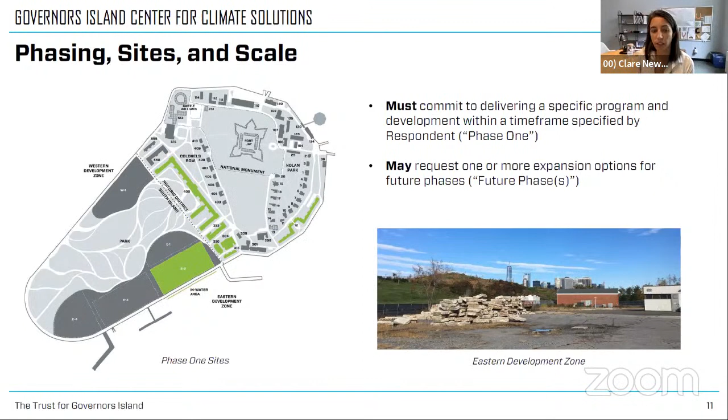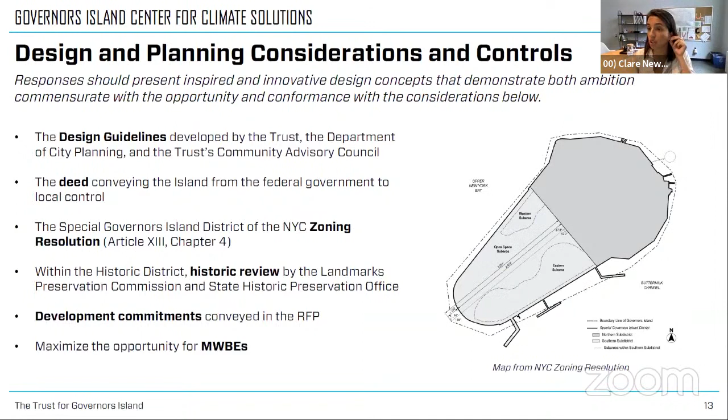Once we have the responses, this summer we'll be leading a selection process. We have partners from across the city who are part of that selection committee, including DCP, the Mayor's Office of Equity, and the Mayor's Office of Climate and Environmental Justice. We'll also be seeking, as part of this phase of the project, something new that wasn't part of the RFEI: input from a formal outside advisory committee. They're not providing selection inputs, but they're helping advise the committee on strengths, weaknesses, and opportunities associated with this proposal. That advisory committee has been announced.

It's formed of experts in the fields of climate science, environmental justice, environmental policy, philanthropy, and business.

And then, of course, to enable the review and public engagement, we're seeking significant detail around the programming and the design itself. Especially for phase one, we're asking for detailed design drawings and enough of the aesthetics that we can go out and explain to people what this thing is going to look like, as well as an implementation plan so we can truly gauge feasibility. For additional potential future phases, we're looking for conceptual level design, once again to help guide the selection and input process.

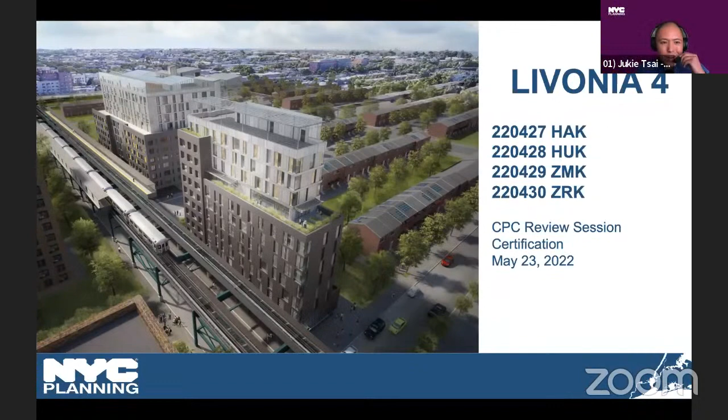This is an application by the Department of Housing Preservation and Development, HPD, for a UDAAP and disposition, an urban renewal plan amendment, and a zoning map and text amendment, all to facilitate 4 new 100% affordable 11 and 12-story mixed-use buildings, totaling 430,000 square feet with approximately 498 dwelling units.

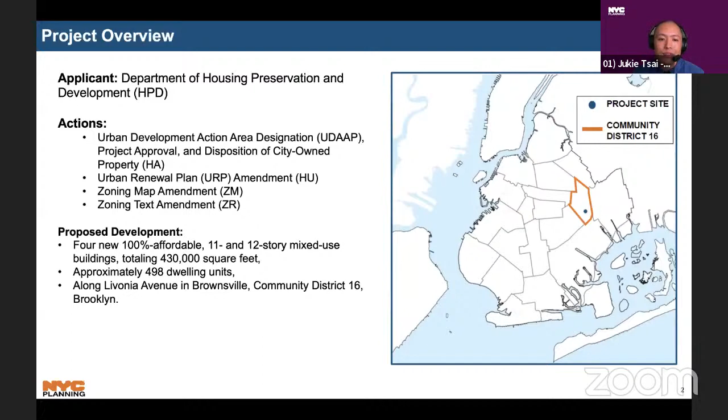This application has 2 project areas located along Livonia Avenue in the Brownsville neighborhood of Brooklyn, Community District 16. Next slide.

Livonia 4 is part of HPD's 2017 Brownsville Plan, which was a community-based planning process to develop a shared vision and plan for the future of Brownsville. In coordination with the release of the Brownsville Plan, HPD issued the Brownsville RFP to develop several large, vacant, city-owned sites within Brownsville, each focusing on a specific theme to address community goals. The theme of Livonia 4 is healthy living and food systems.

In addition to Livonia 4, the Brownsville Plan identified 2 other sites to be developed. The first was Glenmore Manor - the commission approved a rezoning for it in 2021. The other is Rockaway Chester, which is yet to come. Next slide.

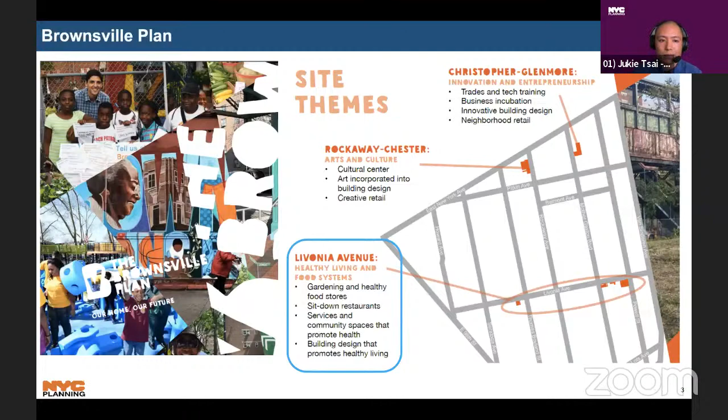The proposed developments at sites C1, C2, C3, and C4 are 4 new buildings containing approximately 430,000 square feet of floor area. This includes residential floor area, commercial retail floor area, community facility, and community facility with sleeping accommodations. This includes 498 affordable apartments and 15 parking spaces. Next slide.

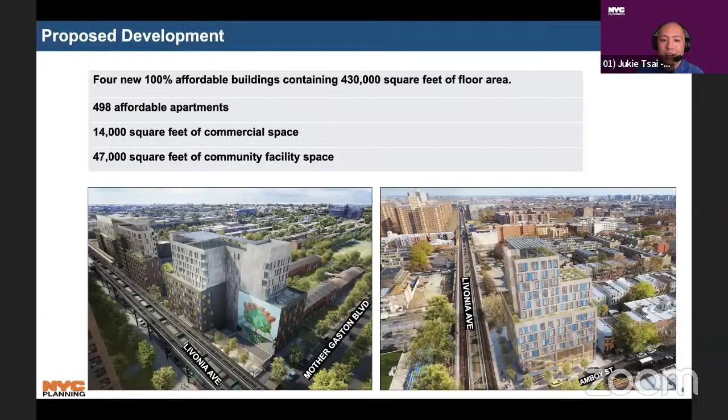Livonia 4 consists of 4 development sites within 2 project areas on Livonia Avenue along the elevated 3-train line. Project Area 1 is generally bounded by Livonia Avenue to the north, Powell Street to the east, Riverdale Avenue to the south, and Mother Gaston Boulevard to the west. Development sites C1, C2, and C3 are located within Project Area 1.

Project Area 2 sits approximately 5 blocks to the west, and these are pretty long blocks. It is generally bounded by Livonia Avenue to the north, Thomas S. Boyland Street to the east, Riverdale Avenue to the south, and Amboy Street to the west. Development site C4 sits within Project Area 2.

The surrounding area is primarily residential. To the north are NYCHA's Van Dyke houses, Tilden houses, and Brownsville houses, built around the 1950s and 60s. To the south are the Nehemiah homes, built in the 1980s. To the east, across the elevated L train tracks, are the Livonia apartments, built after the 2013 Livonia Commons rezoning. To the west is Marcus Garvey Village, which was subject to the 2018 Marcus Garvey Village rezoning and has since seen new residential construction.

The major commercial corridor serving the area runs along Pitkin Avenue, which runs parallel to Livonia Avenue, approximately 4 or 5 blocks to the north. It is out of the frame here. There are also clusters of commercial retail along Rockaway Avenue, where it intersects with Pitkin, and along Mother Gaston Boulevard, where it intersects with Pitkin Avenue.

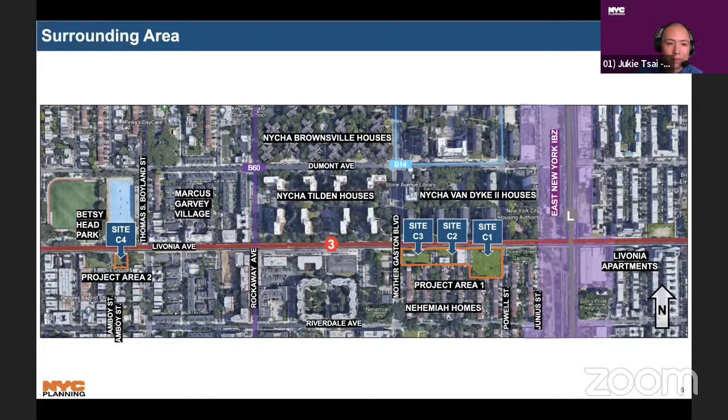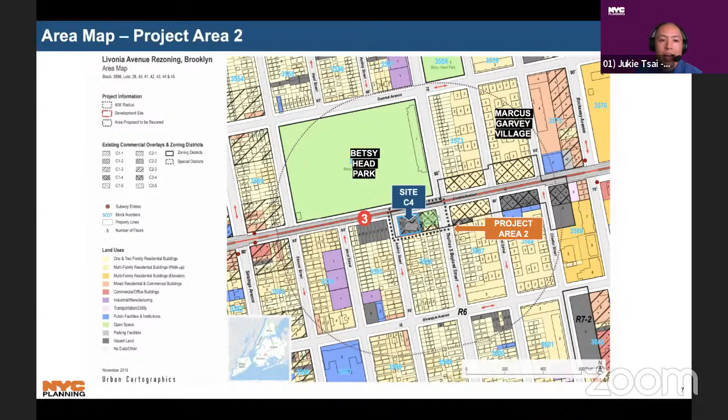The lots in Project Area 2 are zoned R6. The primary zoning district map within the surrounding areas is also R6. 3 blocks to the west is a C2-3 commercial overlay along Livonia Avenue, beginning at Strauss Street. An R7-2 district mapped with mandatory inclusionary housing is located directly east of Project Area 2. This was mapped as part of the 2018 Marcus Garvey Village rezoning.

There are a variety of land uses in the area surrounding Project Area 2. To the north is Betsy Head Park, open space shown on this map in green. To the south, east, and west are 1- and 2-family, as well as multifamily residential buildings, shown here in light yellow and beige. To the west, there's also vacant land shown on this map in gray.

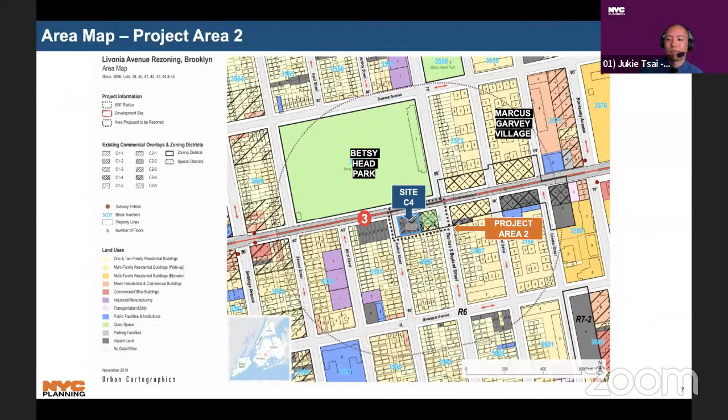Project Area 1 consists of 20 tax lots with a total lot area of approximately 80,000 square feet. It is mostly vacant city-owned land, though there are also some privately owned sites.

Development Site C1 is a 40,400 square foot zoning lot, currently vacant land owned primarily by the city. Development Site C2 is a 9,150 square foot zoning lot made up of vacant city-owned tax lots. Development Site C3 is an 18,500 square foot zoning lot made up primarily of vacant city-owned tax lots and 1 privately owned tax lot that was recently acquired by the planned developer.

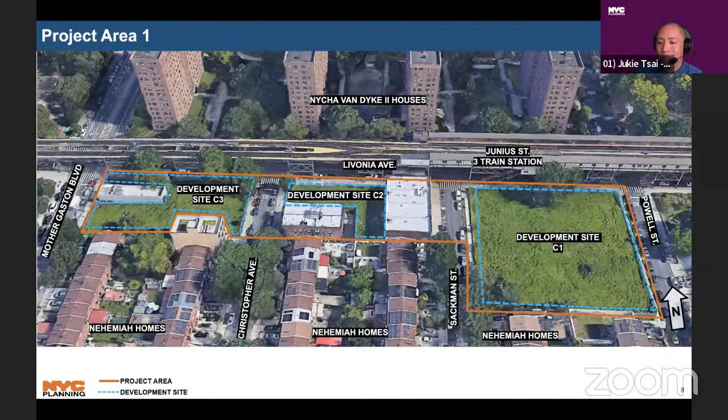Moving into photos of Project Area 1. The orange line here designates the project area, and the blue dashed line designates the development site. This photo faces southwest from Livonia Avenue towards Development Site C1, and you can see a locator map in the upper right-hand corner.

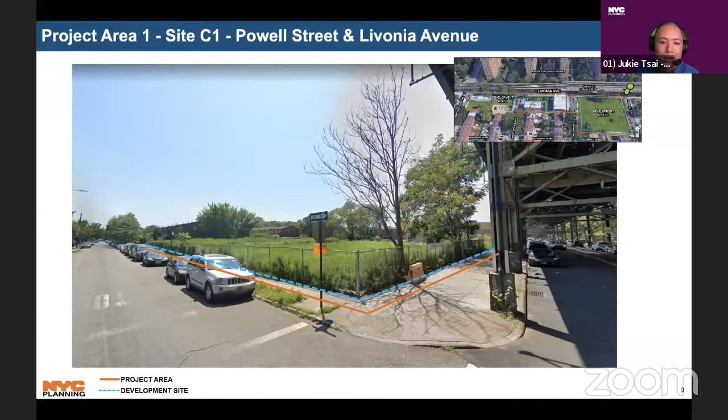This photo faces southwest from Livonia Avenue. To the right of the frame is development site C2, shown with the blue dashed line. This photo shows Tabernacle Baptist Church, a lot not owned by the applicant but falling within the project area to be rezoned, known as an outparcel.

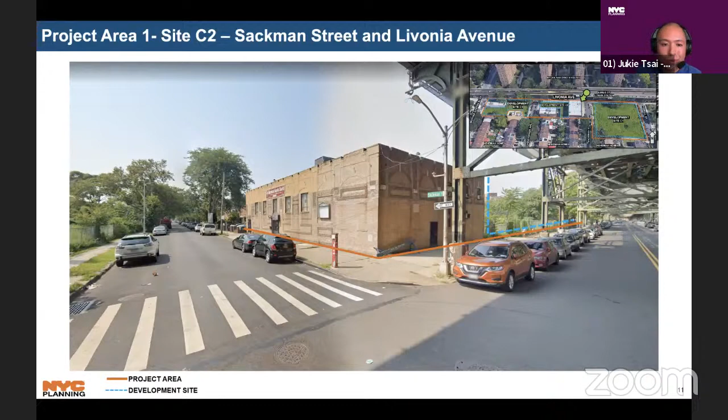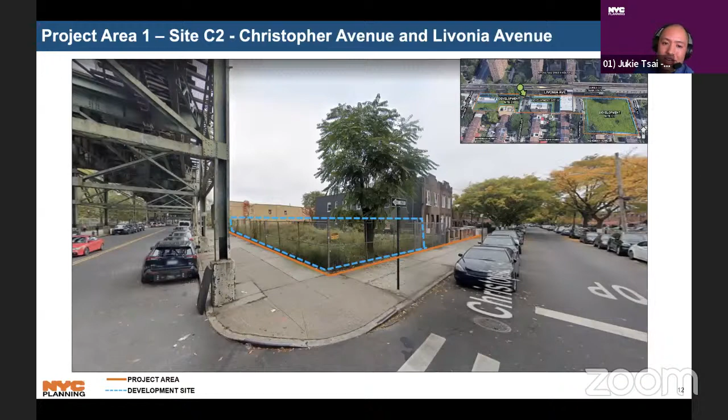This photo faces southeast from Livonia Avenue towards development site C2. It shows two existing residential buildings, outparcels within project area 1.

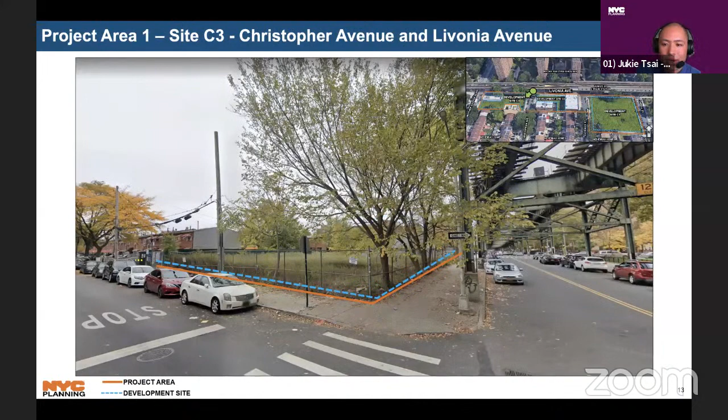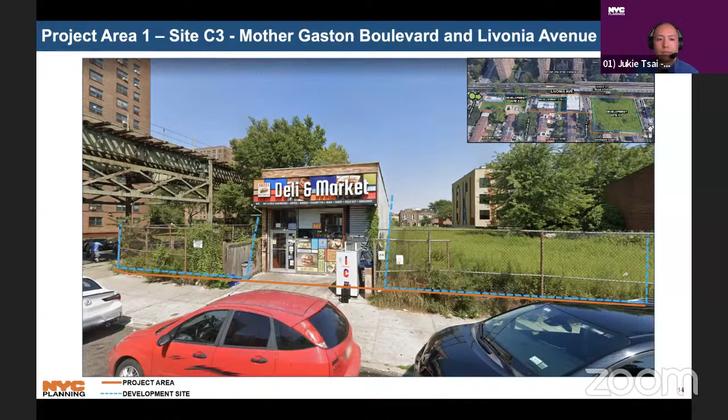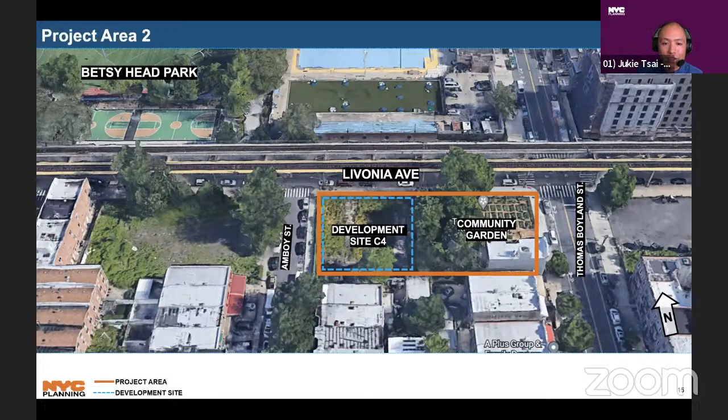Project area 2 consists of 7 tax lots with a total lot area of approximately 20,000 square feet, including vacant city-owned lots, privately owned lots, and the Thomas Boyland Community Garden. Development site C4 is a 10,000 square foot zoning lot on a vacant city-owned tax lot.

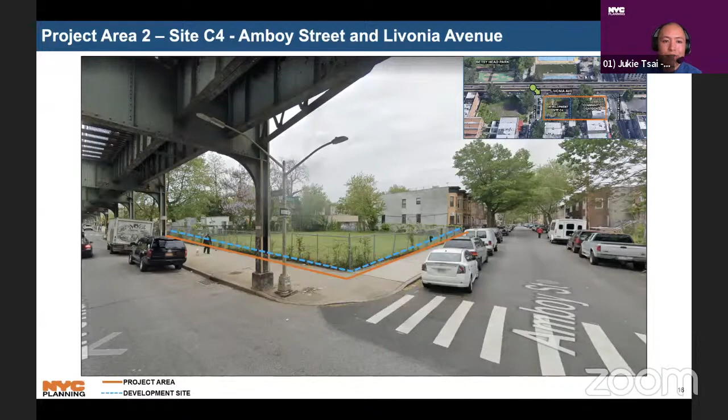This photo faces southwest from Livonia Avenue and Amboy Street towards development site C4. Moving on to our proposed developments.

This rendering faces southwest from Livonia Avenue, looking from under the elevated subway tracks at the proposed development at site C1. The proposed development is a 12-story mixed-use building containing approximately 207,000 square feet of floor area with an FAR of 5.15. This includes 225 multifamily affordable rental units, an 8,700 square foot supermarket, and 4,000 square feet of local retail. Site C1 would be constructed with varying heights.

It would be set back approximately 15 feet from Livonia Avenue, allowing natural light to reach the street level, before rising to a height of 75 feet. Above 75 feet, the building would set back 15 feet before rising to a final height of 130 feet. Site C1 would include an underground parking garage with approximately 15 parking spaces associated with the building's commercial uses, accessible via a proposed curb cut on Sackman Street.

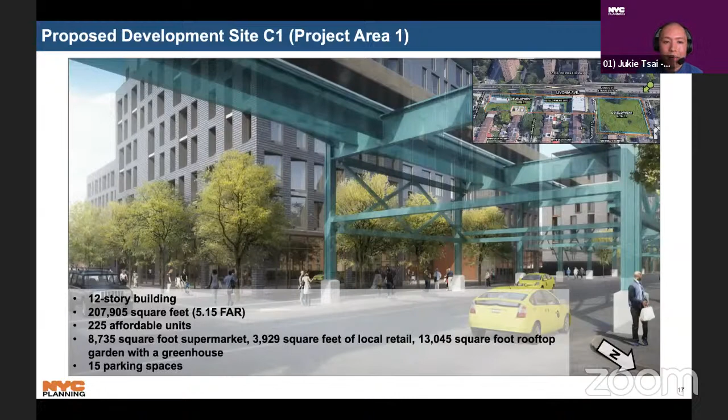The commercial and community facility uses would be accessible on the ground floor from Livonia Avenue. The main residential entrance would be located on Sackman Street. The community facility space is anticipated to include an approximately 13,000 square foot rooftop garden with a greenhouse. Building amenities include a mailroom, community room, laundry room, bike room, and a landscape terrace accessible to residents.

This aerial rendering faces southeast from Livonia Avenue, looking at Site C2. The proposed development is an 11-story building containing approximately 53,000 square feet of floor area with an FAR of 5.84, including 80 supportive housing units.

On the ground floor, there would be 4,800 square feet of community facility area. Site C2 would set back approximately 6 feet from Livonia Avenue before rising to a height of 75 feet. Above 75 feet, the building would set back 9 feet before rising to a final height of 115 feet.

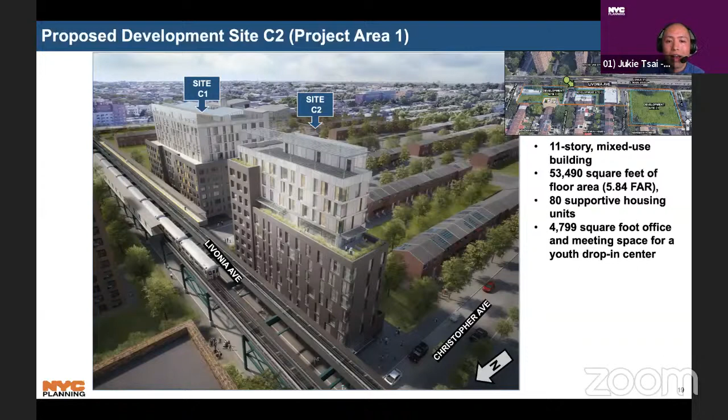The main entrance for building residents and visitors to the community facility space would be located on Livonia Avenue. Building amenities include a mailroom, community room, laundry room, bike storage room, and a landscape terrace accessible to residents. No parking spaces would be provided at the proposed development.

This rendering faces southwest from the north side of Livonia at Site C3. The proposed development is a 12-story mixed-use building containing approximately 104,000 square feet of floor area with an FAR of 5.61. This would include approximately 139 senior housing units, 1,600 square feet of local retail on the ground floor, and a 9,700 square foot senior center, also on the ground floor.

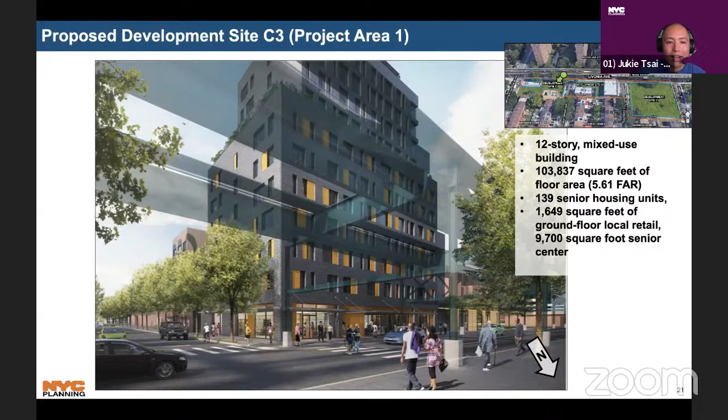The proposed development at Site C3 would set back 5 feet from Livonia Avenue before rising to a height of 75 feet. Above 75 feet, the building would set back 13 feet before rising to a final height of 125 feet. The main residential entrance would be located on Mother Gaston Boulevard, while retail and community facility spaces would be accessible from Livonia Avenue.

During the ULURP process, HPD will work with a team of architects and designers to do community outreach to determine the best design and use of the proposed landscape activity space at the corner of Mother Gaston Boulevard and Livonia Avenue, shown in the upper left-hand corner here. Building amenities include a mailroom, community room, laundry room, bike storage room, and a landscape terrace accessible to residents. There will be no parking spaces provided.

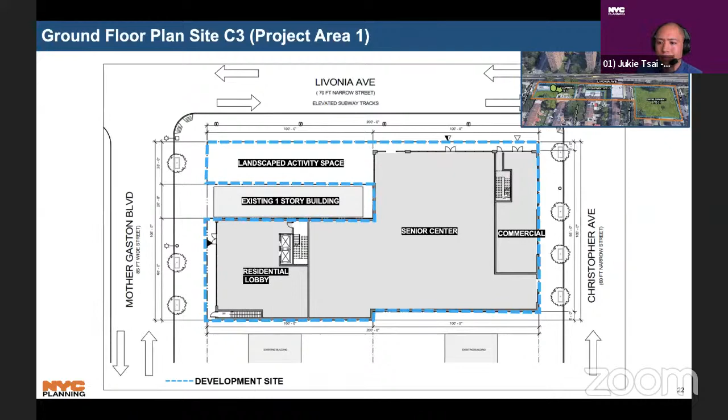This aerial rendering faces southwest from Livonia Avenue and Amboy Street at Site C4, which is in Project Area 2. The proposed development is a 12-story mixed-use building containing approximately 65,000 square feet of floor area with an FAR of 6.49. This would include approximately 54 affordable units and a 19,000 square foot youth recreation facility on the ground floor.

The proposed building would set back 5 feet from Livonia Avenue before rising to a height of 75 feet. Above 75 feet, the building would set back 15 feet before rising to a final height of 129 feet.

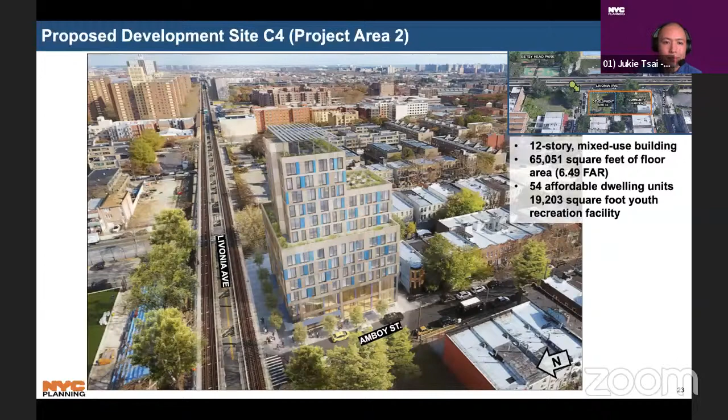The main entrances for building residents and visitors to the community facility space would be located on Livonia Avenue. Building amenities would include a mailroom, community room, laundry room, bike room, and a landscape terrace accessible to residents. No parking spaces would be provided.

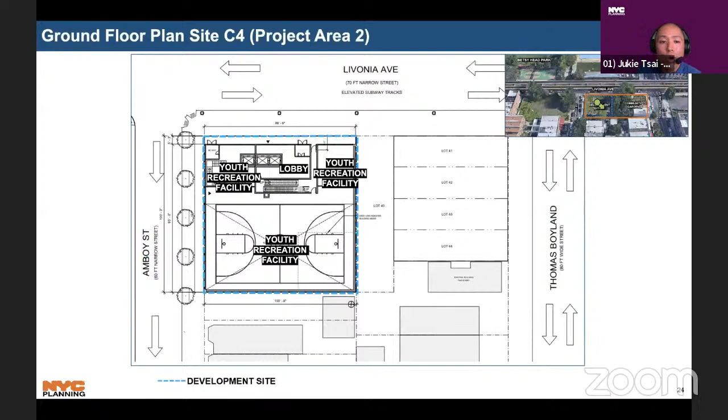HPD proposes 4 actions to facilitate the proposed developments. First, an urban development action area designation, project approval, and disposition of city-owned property, known as a UDAAP. Second, an urban renewal plan amendment to change the urban renewal area land use designation from commercial to residential. Third, a zoning map amendment. Fourth, a zoning text amendment to map an MIH area.

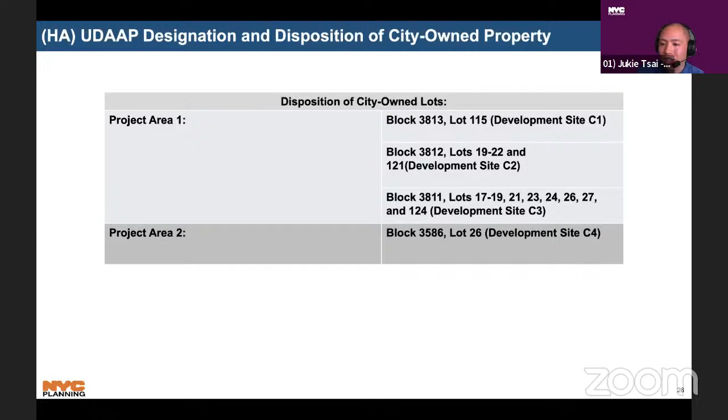The first action the applicant proposes is an urban development action area project designation and disposition of city-owned property for 16 tax lots on 4 blocks within Project Area 1 and Project Area 2. You can see those lots listed here on the slide.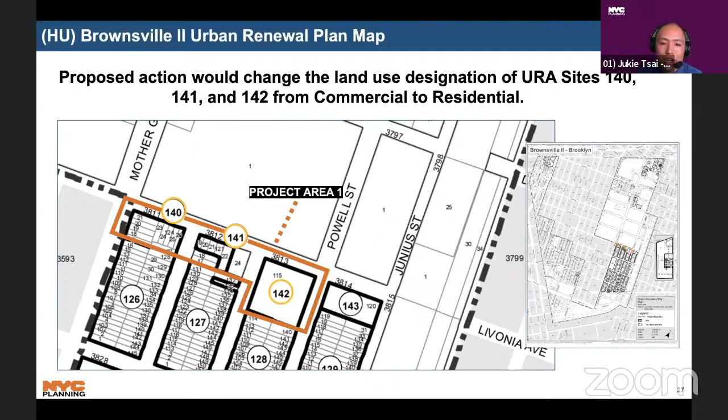The second action the applicant proposes is an urban renewal plan amendment action to change the land use designation of urban renewal area sites 140, 141, and 142 from commercial to residential use. These sites fall within Project Area 1. This would allow residential use in addition to commercial use pursuant to zoning on these sites.

The third action the applicant proposes is a zoning map amendment. This slide shows the proposed change in Project Area 1 from R6 C2-4 to an R7-2 C2-4 district.

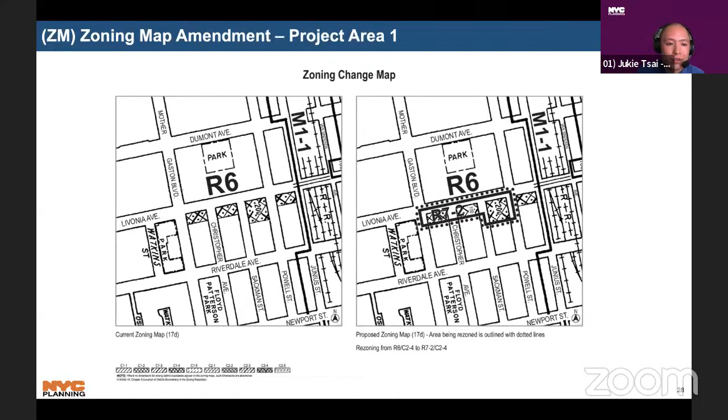In Project Area 2, the applicant proposes a zoning map amendment from R6 to R7-2 C2-4. This would extend the nearby R7-2 C2-4 district, which was approved by the Commission in 2018 for the Marcus Garvey Village rezoning.

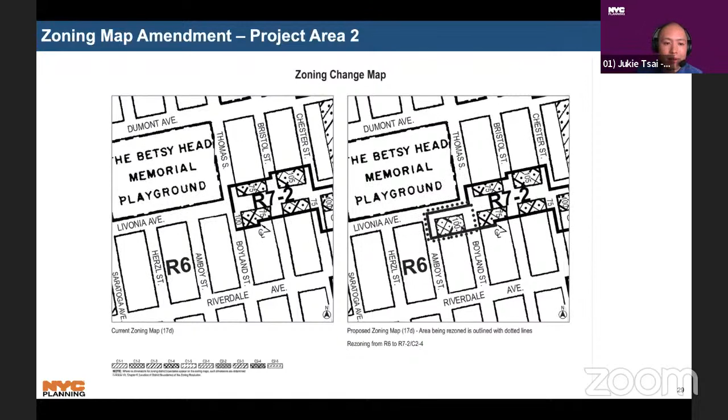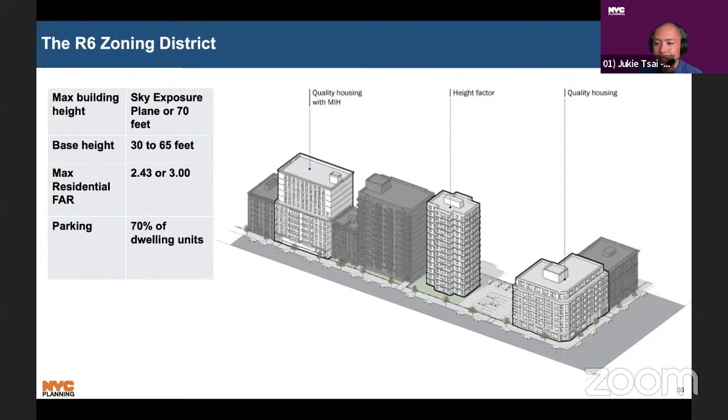The R6 district is a medium density apartment building district. It results in 7 to 14 story apartment buildings. It is mapped all over the city and can result in a wide variety of building types, from tower-in-the-park style buildings to 6 to 8 story apartments. You can see some of the specifics listed on the left-hand side.

The R7-2 zoning district is a quintessential New York City apartment building district. It results in 10 to 13 story apartment buildings. It is especially appropriate along Livonia Avenue, where the flexible regulations allow a setback from the elevated train. When paired with MIH, it has a base height of 40 to 75 feet and a maximum building height of 135 feet. C2-4 districts are commercial districts mapped as overlays within residential districts. They allow a range of local serving retail and service uses. Commercial uses have a maximum FAR of 2.0.

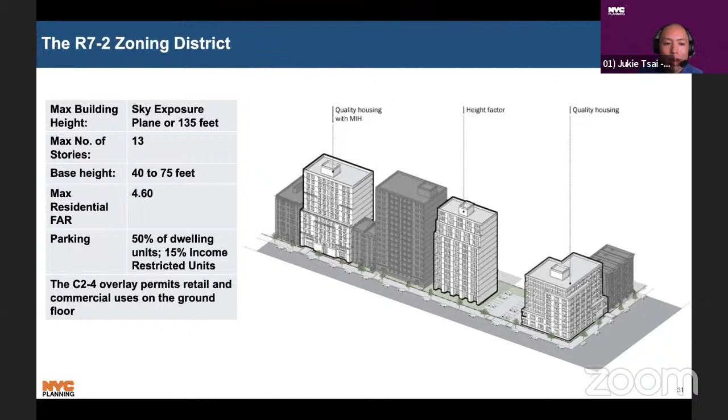The fourth action the applicant proposes is a zoning text amendment to map an MIH area over Project Area 1 and Project Area 2. This is according to MIH Option 1 and MIH Option 2.

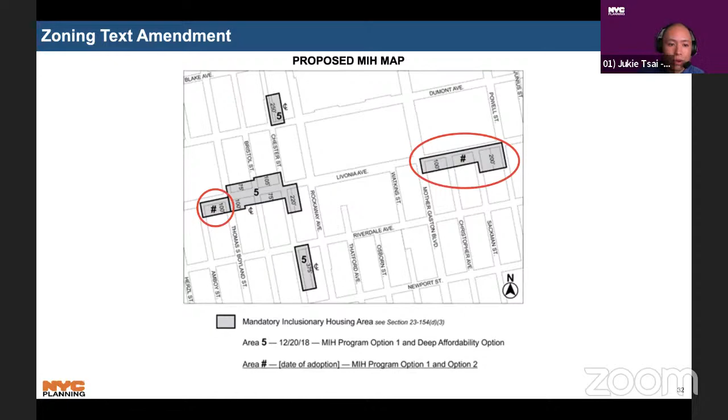In summary, this is an application by HPD for 4 land use actions to facilitate 4 new 100% affordable 11 and 12 story mixed use buildings totaling 430,000 square feet with 498 dwelling units in Brownsville, Community District 16, Brooklyn. Thank you, this concludes my presentation, and I'll take any questions.

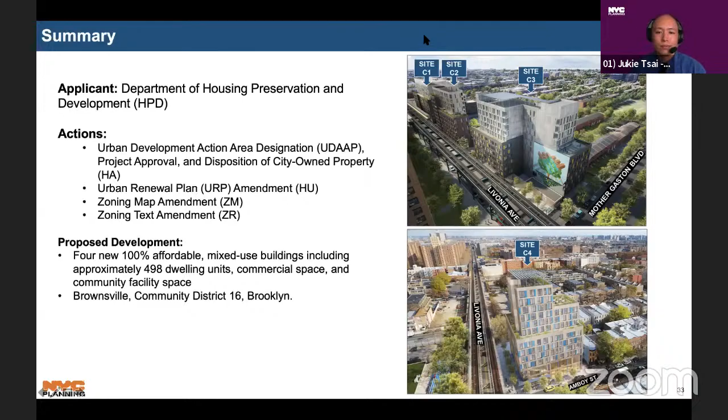Thank you, Jukie. Excellent work. We really appreciate it. Let me just pose a few questions to you to get the ball rolling over here.

First, on site C3, you noted that there was some landscaped activity space. I just want to confirm, that is for the public as opposed to for the residents of the buildings? Yes, my understanding is that it's for the public, and the intent is to really activate that Livonia Avenue corridor for just a pleasant pedestrian experience, and then, of course, for residents who want to spend time there as well.

Great. And then on the disposition of the 15 tax lots, this is entirely being developed, all of the 4 buildings that you described over the 2 areas, it's all being developed on lots that are being sought to be disposed of here through this action. Is that right? Yeah, for the most part, yes. There's in site C3, 1 privately owned lot that was acquired by Catholic Charities that I mentioned. But the intent of all of the disposition of these properties is for the building of these development sites. Does that make sense?

I see, and yeah, it does. And so that 1 lot that was acquired by Catholic Charities, is that lot part of, is that an out parcel, or is that actually one of the lot?

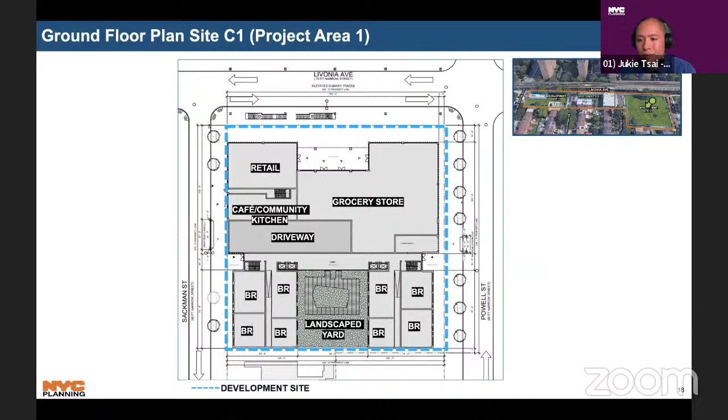Okay, thank you. Thank you, Commissioner Rampershad.

Commissioner Burney, I still see your hand raised, but I think that's a relic from before. Okay, so I see it is. Any other questions from the commission?

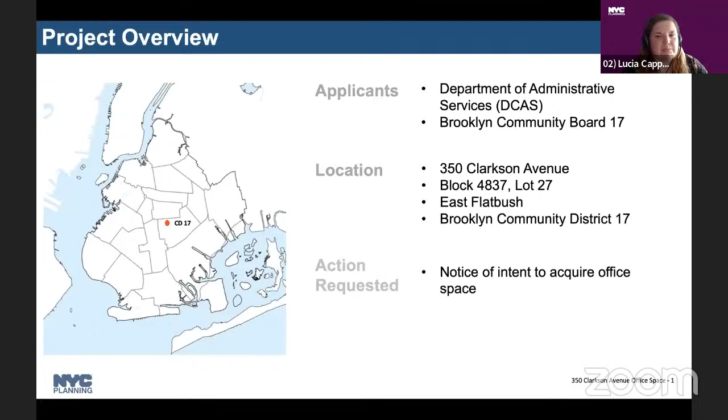Good afternoon, Chair Garodnick and commissioners. Next slide, please. This is a pre-hearing for a 195 office space application by the Department of Citywide Administrative Services and Brooklyn Community Board 17 for the acquisition of office space for use of property located at 350 Clarkson Avenue in East Flatbush, Brooklyn Community District 17.

Next slide, please. The proposed project area is located on Clarkson Avenue, between Nostrand and New York Avenues. It is well served by public transit and located within 2 blocks of the Winthrop Street subway station, served by the 2 and 5 trains. The B44 bus connecting Williamsburg to Sheepshead Bay and the B12 bus connecting Lefferts Gardens to East New York run on Nostrand and New York Avenues respectively. Notably, the site is also 1 block from SUNY Downstate Medical Center, shown here in orange, where CB17 holds its larger public hearings. Next slide, please.

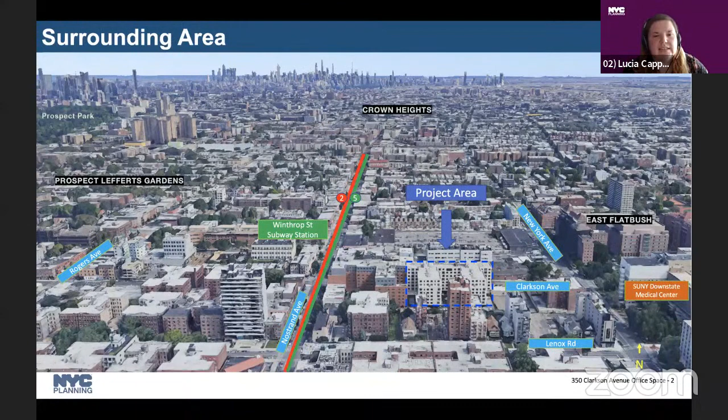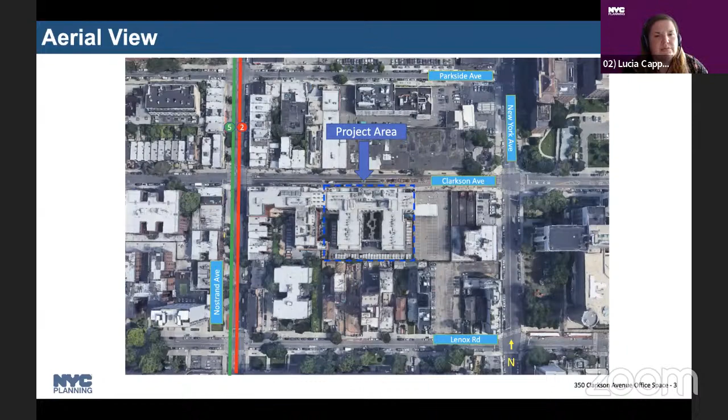This is an aerial view of the proposed project area, which is outlined in blue. The project site is an 8-story mixed-use building with ground floor commercial space.

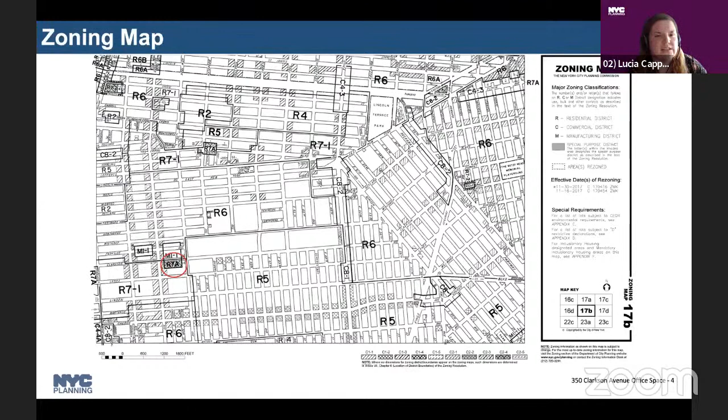This is a zoning map showing the proposed project site is located in an R7A/C2-4 district. R7A districts typically produce high lot coverage 7 to 9-story buildings. The surrounding zoning includes the residential districts of R7-1, R6, and R5 with some commercial overlays and two small M1-1 districts located to the north of the project site.

This is an area map showing the proposed project site outlined in red. It's located in the northwestern corner of CD17 in a mainly residential and commercial area. This site is within a few blocks of the Nostrand Avenue and Church Avenue commercial corridors. It was rezoned from an M1-1 district to an R7A/C2-4 district in an application approved by the City Planning Commission in March 2009 to facilitate three attached mixed-use buildings, one of which is now the proposed project site.

The surrounding project area comprises a range of uses, including residential, shown here in yellow, orange, and brown, commercial, shown in red, community facility, shown in light blue, and industrial, shown in light purple. Within a few blocks of the project site, there's a mix of 1 and 2 family homes, medium density row houses, and multifamily apartment buildings, which range in height from 6 to 16 stories.

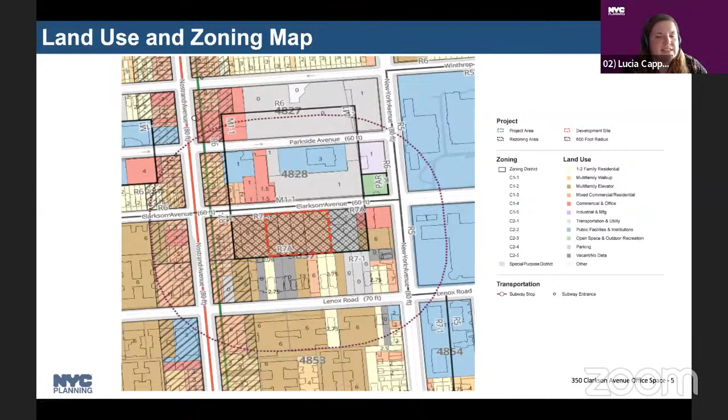The current CB17 district office is located at 4112 Farragut Road in the southeast corner of the district. The approximately 2,000 square foot office space acquisition was approved by the City Planning Commission in May 2014.

Based on information from CB17 staff, however, the space is no longer suitable for long-term occupancy. Staff have reported issues with the sewage trap, located inside the office, that emits a strong odor and floods during heavy rainfall events. These issues have consistently disrupted the day-to-day operation of the office. Repeated attempts to repair the building to address these issues have not been successful.

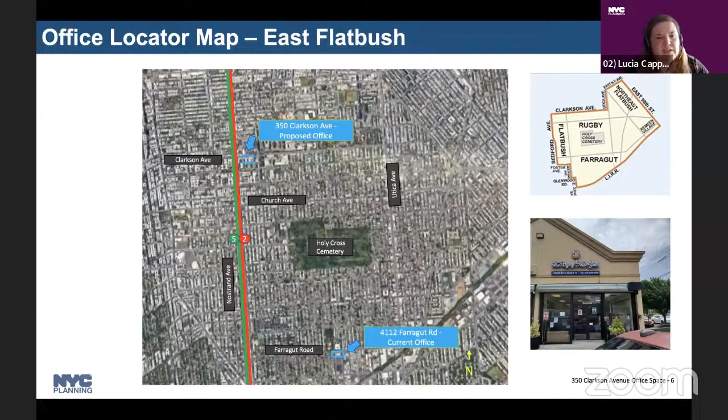The new proposed office site is located in a privately owned, recently constructed 225,000 square foot mixed-use residential and commercial development. It is 8 stories tall and contains 250 residential units with ground floor commercial space.

The ground floor of the building fronts on Clarkson Avenue and includes currently unleased commercial space. The site is bounded by Clarkson Avenue to the north, New York Avenue to the east, Nostrand Avenue to the west, and Lenox Road to the south. There are no curb cuts along the building's frontage. According to DCAS, the proposed office space lease would be for 20 years with a 5-year renewable option.

The new office space will consist of a reception area, conference room, and guest restroom. The conference room will be outfitted with top-of-the-line AV capabilities to facilitate remote meetings and presentations. A separate employee area to the rear of the space will consist of an open layout with 4 workstations, a pantry, an employee restroom, filing space, and storage closets.

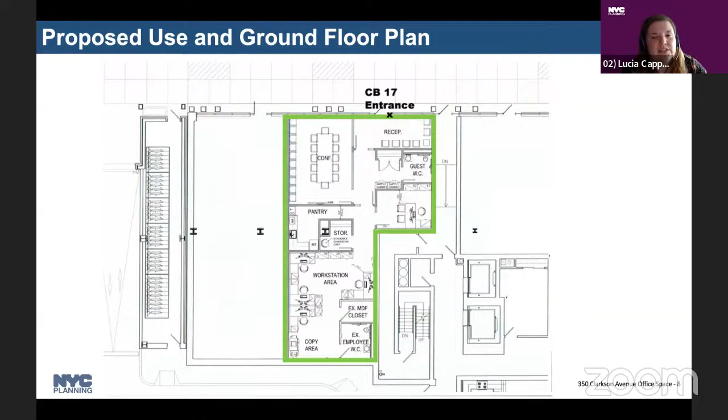In summary, the requested action, notice of intent to acquire office space, was submitted by DCAS and CB17 pursuant to Section 195 of the New York City Charter to make use of the property located at 350 Clarkson Avenue, relocating Community Board 17 offices from their existing location at 4112 Farragut Road. Thank you, and I'm happy to answer any questions.

Thank you, Lucia. Excellent. Thank you. We've got some great first timers. We love it. This feels pretty straightforward to me. I'm going to see if there are questions from the commission.

There are none, so you got it all. Thank you very much for that, we appreciate it. Great, thank you, Chair. Thank you. Okay, thank you.

Okay, Ryan, we're going to send this one to a public hearing for this Wednesday, May 25th.

Ryan, what's up next? Third item on our agenda is a pre-hearing review of an amendment to the rules of the City of New York pursuant to the Citywide Administrative Procedure Act. People were wondering what CAPA stood for. Ezra Moser is here to present. Hi, good afternoon, everyone.

Next slide, please. So the requested action is to update the theater subdistrict fund's contribution rate by amending the New York City rules via the Citywide Administrative Procedure Act, also known as CAPA. Section 81-744 in the special Midtown District text allows what are called listed theaters to transfer their unused floor area to receiving sites district-wide, and those transfers are subject to a per square foot contribution to the theater subdistrict fund.

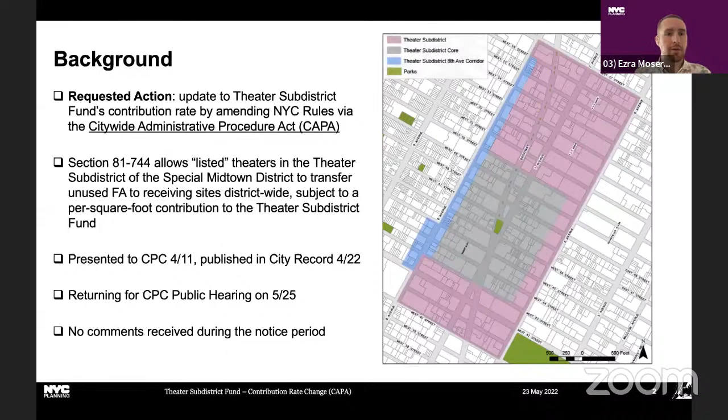During the comment period where it was noticed in the city record, no comments were received. But we do anticipate comments to be submitted to the commission by Community Boards 4 and 5, as well as the borough president. Also noting that in the case of these CAPA type applications, the testimony submission period ends at end of day on the day of hearing, so on the 25th.

Potentially the commission could vote on that rule change on June 8th, barring any further discussion. Following that June 8th date, it would have to be published again in the city record for a mandatory waiting period. If this timeline were followed, the rule would go live on July 13th. Again, this is assuming not a lot of further discussion. If there are extra review sessions to discuss, it gets pushed back by two weeks or so.

I have a whole variety of appendix slides providing details on the action itself, but because we presented this to the commission relatively recently, those are in the appendix. So that concludes the presentation. I'm happy to answer any questions, but there are more slides with more details for those interested.

Great, thank you very much, Ezra. Vice Chair Knuckles.

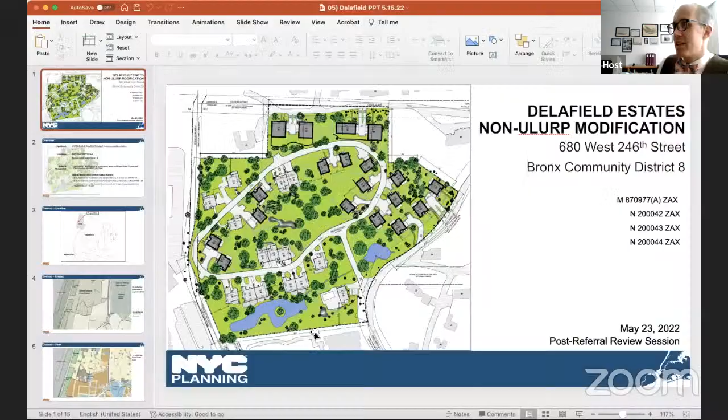Ryan, do you want to move on to a new borough here? Sure. So the fifth item on our agenda is a post-referral review of a non-ULURP modification to a previously approved authorization and authorizations pursuant to the Special Natural Area District in the Bronx Community District 8. Juton Horseman is here to present.

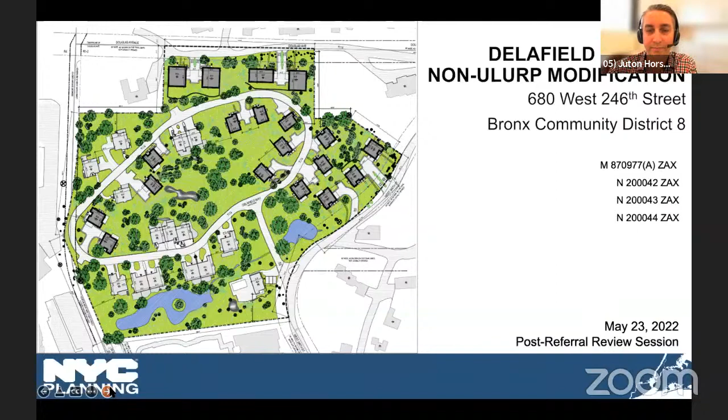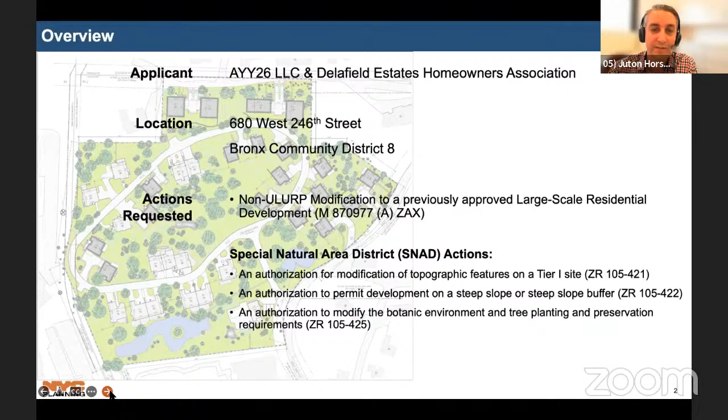Great, thank you. Good afternoon, Commission. So this is a post-referral presentation for the Delafield Estates non-ULURP modification. The applicant, AYY26 LLC and Delafield Estates Homeowners Association, is proposing a non-ULURP modification to a previously approved large-scale residential development and 3 special natural area district authorizations to allow the placement of 19 buildings within the large scale.

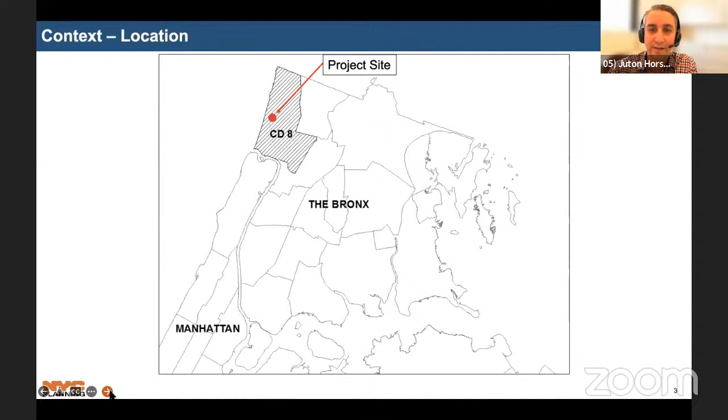The site is located in the Riverdale neighborhood within Community District 8 in the Northwest Bronx. The site is in an R1-2 zoning district and within the Special Natural Area District. The project site, highlighted in red, is an 11.15 acre site.

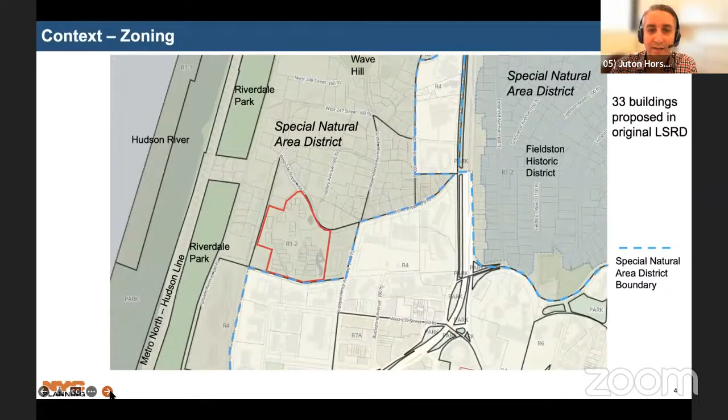14 of the 33 original homes proposed have been built, which you can see the location of the homes in yellow. The uses in the area are predominantly single family to the north and west, where it is R1-2 zoning district. To the south and east, where it is an R4 zoning district, these areas are more mid-density. To the immediate south are 6 to 7 story buildings with some 12 to 15 story buildings slightly further away.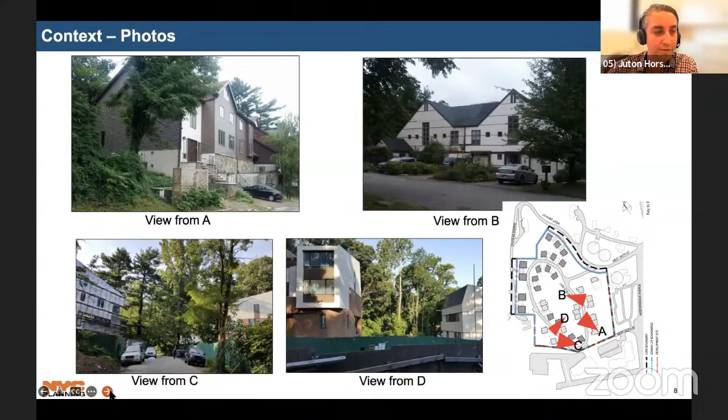To give some history on the site, in 1980 the original site plan was approved, which sought 13 actions as part of the original large-scale residential development. The plan would have subdivided the site into 33 zoning lots, but the zoning lot subdivision never occurred, so the entire site is part of a single zoning lot today. 7 of the original 13 actions were never used or vested. The ones that were used and vested were to modify the distance between buildings and number of natural area authorizations in order to allow the proposal to be built within the natural area district.

In 1987, the applicant came back for a modification to the original configuration and relocated several of the buildings. In 2011, the applicant came in with a restoration plan that was completed in 2013, and from this change they closed the ring road where there were 2 cul-de-sacs before, creating a full circle. There were site improvements that also occurred as the applicant was required to do cleanup and improvements to the site as part of the site mitigation.

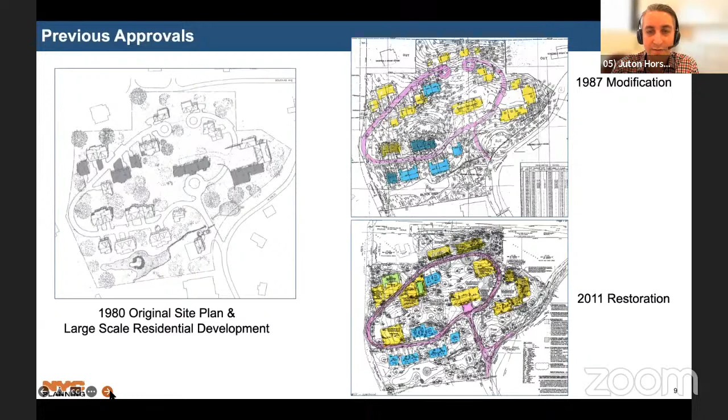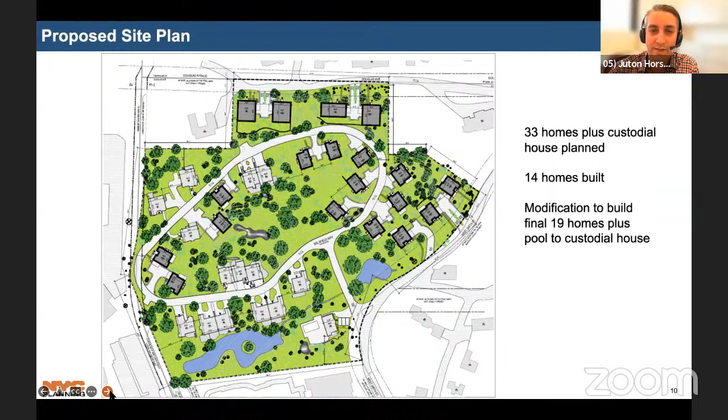Of the 33 original homes proposed, 14 were built, shown in white. The applicant is proposing to build the remaining 19 homes, shown in darker gray. These 19 homes will be between 3,000 and 4,500 square feet, 2 stories with an attic and basement. Additionally, there's a 1,200 square foot pool planned behind the custodian's house at the 246th Street entrance.

Here's a comparison of the previous approval with the proposed modification. The original plan sought to cluster the homes in the northeast as well as abut one another as semi-detached. Under the proposal, each home would be a single-family building.

There is about a 46,000 square foot building built on the site today. By building the remaining 19 units, it'll add approximately 63,000 square feet to bring the total floor area to about 111,000 square feet, increasing the FAR from about 0.1 to about 0.23. In an R1-2 zoning district, the max FAR is 0.5.

With the proposed modification, the proposal will not increase the unit count, total floor area, or total open space, and would not need any additional bulk approvals.

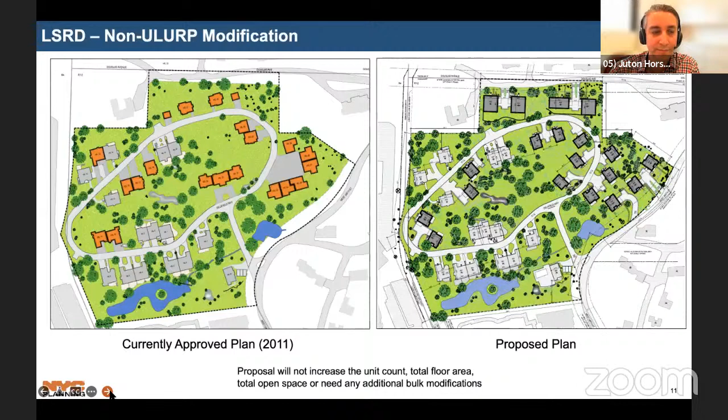In addition to the non-ULURP modification, the applicant is seeking 3 natural area district approvals. Because they're reconfiguring the location of the buildings, the applicant is modifying new topographic features, as well as impacting some of the trees and steep slope areas and steep slope buffers on the site, which requires the authorizations.

To give some context to the natural area authorizations, there are 544 trees on the site today. 153 trees would be removed. However, 154 new trees would be replanted on the site to replace the trees being impacted.

The lot coverage is at about 5.6% today. It would increase by 7.3% to a total of about 12.9%. The hard surface area today is at about 17.9%. It would increase by about 14.3% to a total of about 32.2% of the lot.

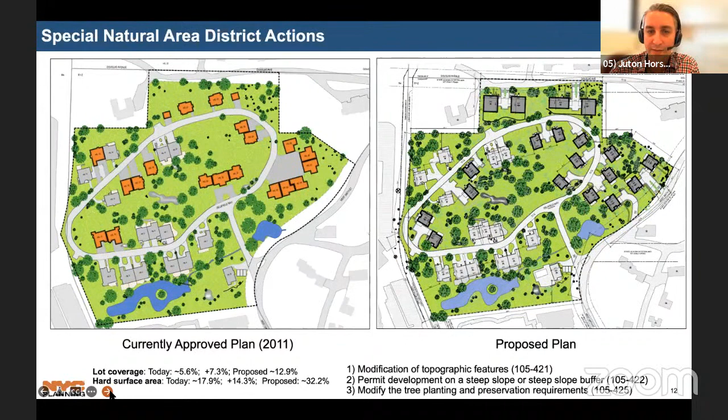On June 9th, 2020, CB8 voted against the project with 33 in support of the resolution, 1 opposed, and 0 abstentions. CB8 noted they were opposed to the application because a version of the project that had all the homes accessed directly off the loop road had not been presented to the committee.

Additionally, during public review, several changes were made to the proposal. The left image was what was referred in September 2019, and the right image is the current proposal with the changes. There was an agreement between the owner and the Riverdale Sanitation Corporation for sewer improvements along West 246th Street.

These improvements are important to ensure that there are no sewer pipe break issues. The owner agreed to build out the sewer along the entire length of West 246th Street along the property and has funded the project in an escrow account to ensure this improvement occurs. This will allow the sewer to be improved by strengthening it. The legal agreement is also in your memo.

This agreement was important because the applicant also modified the proposal to add several curb cuts for new driveway access to the site. Along 246th Street, there was 1 driveway, which will now be 3. Along Douglas, there were 2 driveways, which will now be 4. 6 of the driveways are paired closely to one another and separated by a landscape median.

These driveways were required to fulfill fire department FDNY requirements. Additionally, several of the homes were repositioned or moved slightly to ensure that each new home met all yard and distance between building requirements.

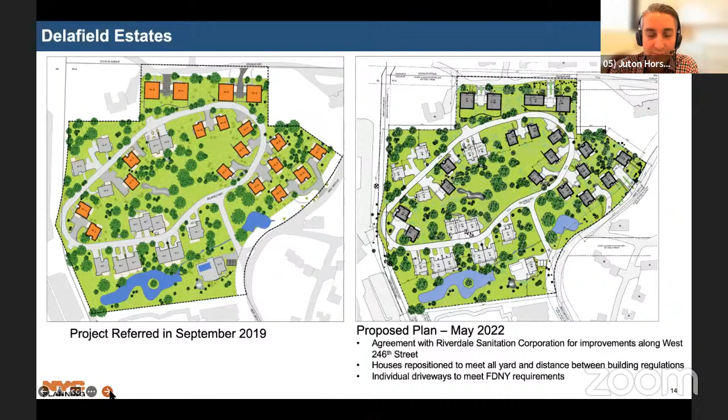To wrap up the proposal, the applicant is seeking a non-ULURP modification and 3 natural area district authorizations to build the remaining 19 homes that were originally planned as part of the large-scale residential development. Thank you.

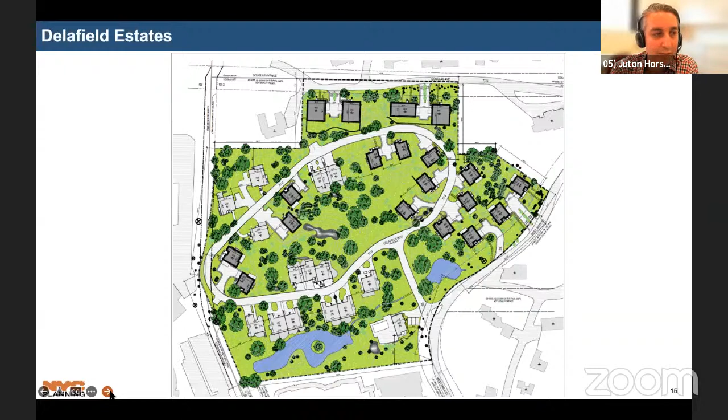Thank you, Juton. Let me just recap a couple things. So you said same number of units. Correct. Same amount of open space. Correct. 153 trees becomes 154 trees. Correct. The primary difference here is the fact that access is not primarily through that ring road in the middle, as opposed to giving some direct access from the street. Is that right? Yeah, I think that is a very accurate summary.

And it moves some of the homes a little further from one another within the existing site plan too. Is that also right? Correct. Yeah. So as noted, in the northeast there had been a cluster of homes, as well as several other places where they were semi-detached, where one was touching or abutting another. This made it so that each one was freestanding, single family. But one of the important points is that even with that change to being a fully single family development, it didn't increase any of the real impacts on the natural features when you look at the 2011 proposal versus the current plan.

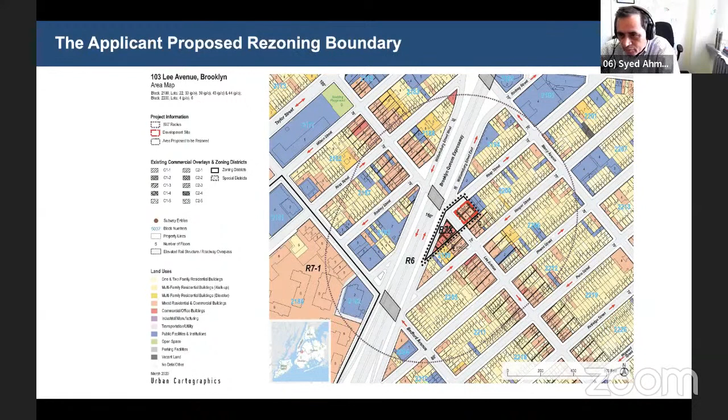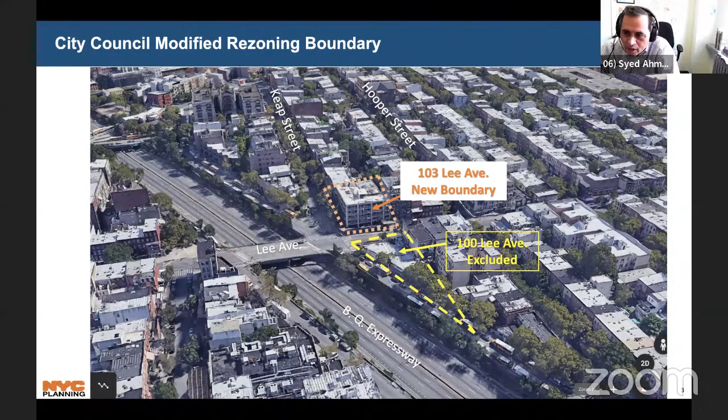The City Council, in a letter to the Commission dated May 16, excluded the non-applicant site 100 Lee Avenue, outlined in yellow, from the proposed zoning map amendment and from the MIH area mapping. The City Council modified boundary now includes only the applicant site 103 Lee Avenue, outlined in orange. The City Council amendment of the zoning map boundaries and the MIH map area is within scope. This concludes my presentation; I will be happy to answer any questions.

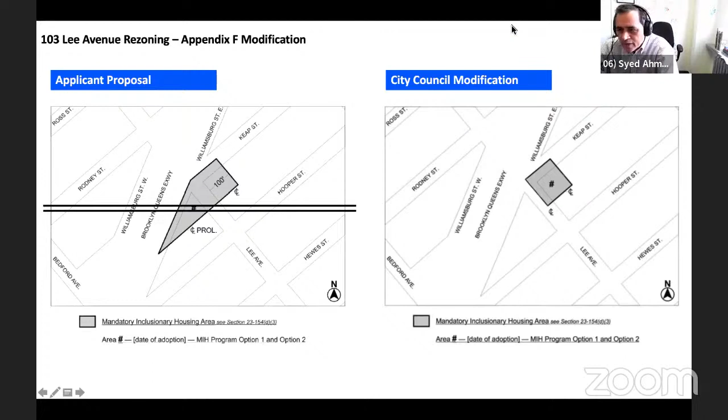Thanks, great, thank you Syed. Let's see if there are questions. Commissioner Goodridge?

This is my bad, but I just want to clarify: is the new proposal for less affordable housing, or is the modification for more affordable housing? By excluding 100 Lee Avenue, which is a soft site and is underdeveloped, the City Council is reducing the potential for more housing. That site would have yielded under the proposed rezoning 44 units instead of 17 units, and out of 44 units, 13 would have been affordable if it remained in the proposed rezoning area.

Do we know why they're proposing this? They said they don't want to put pressure on commercial users on that site, and rezoning might displace them or force them to move.

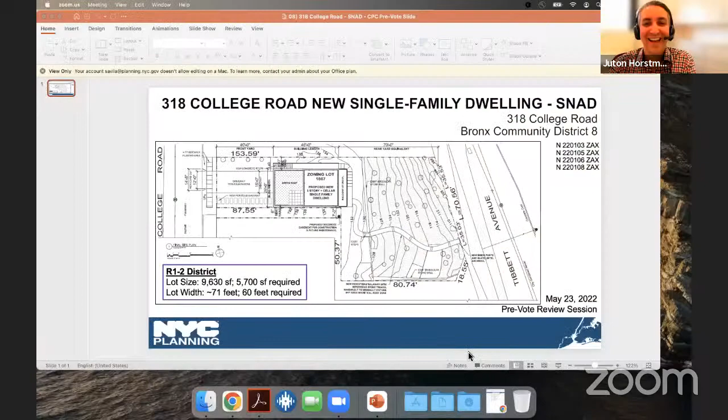For 318 College Road, which is a new single-family dwelling, Jutan will be here to discuss the department's position on this. Yes, so I wanted to start by addressing a concern in many of the letters received by the commission, which was that the lot size and lot width does not meet the minimum requirements, and that the zoning lot should have never been subdivided. In our R1-2 zoning district, the lot size requirement is 5,700 square feet, and the applicant's lot is 9,630 square feet, so it does meet the minimum lot size.

The lot width requirement is 60 feet, and while the College Road width will be about 34.5 feet, the site is a through lot and has approximately 71 feet of frontage along the Tibbett Avenue side to the east, so it meets the minimum lot width as well. So the asks from the letters is that it does actually meet the zoning lot requirements. The Bronx believes that the 318 College Road new building application meets the findings and intentions of the Special Natural Area District, and that the commission should support this proposal.

Thank you, thank you Jutan. And I will note, if I failed to say it before, that we are going to schedule Delafield Estates for a vote as well, so just wanted to note that. Thank you again, thank you for the encore.

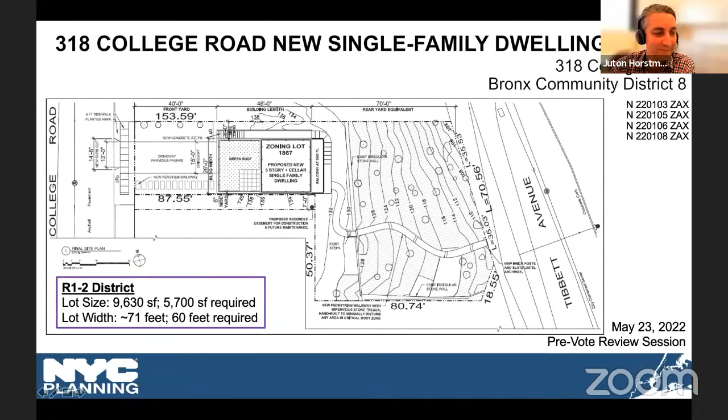For post-hearing follow-up, we have 7739 Bly Place rezoning. I believe Scott is here to give a little follow-up. Good afternoon, Commissioners, Chair Garodnick. So this is just to provide a summary of materials posted to the Chair's briefing package last Friday and this past Friday. First, a resolution from a Kew Garden Hills neighborhood-specific committee within Community Board 8 that recommended the full CB to approve the application, which was approved unanimously, 9-0 at the time, and which identified the building as a benefit to the community, specifically referencing much needed community facility and commercial space and the proposed housing opportunities.

It also identified the proposal as a natural extension of the CB sponsored Kew Garden Hills rezoning from 2019, which promoted larger single family homes to the west of the project area. Second is a petition from over 1,000 residents of CD8 in support of the application as announced by the applicant during the public hearing. Third, a detailed summary provided by the applicant of their community outreach prior to and during ULURP.